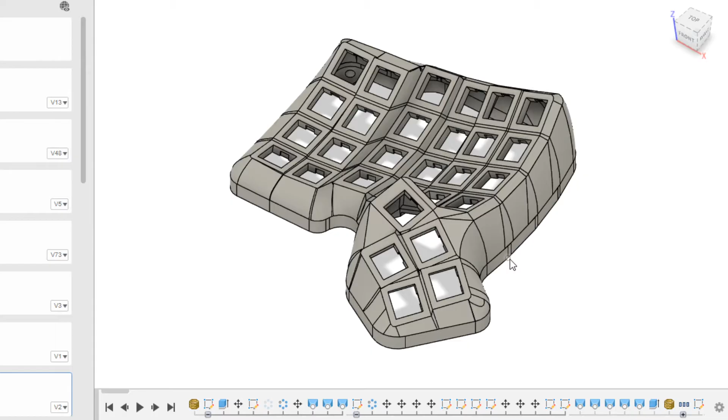Okay, I got the bastard keyboard here. Also tweaked the settings so the video should be a bit better. I just wanted to show you, here the thumb cluster is a mess. Connecting it is always awkward and you have to play around a bit and basically try 1,000 different solutions until you find what works, and that's a lot of effort.

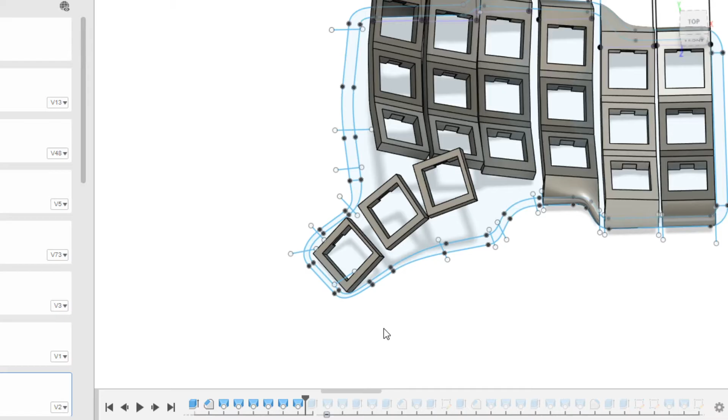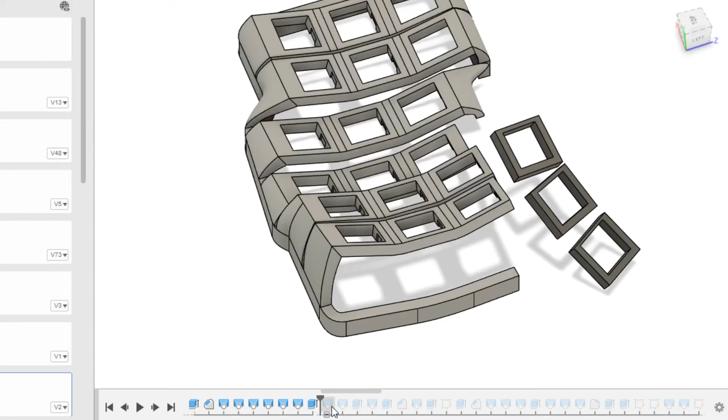So yeah, now I just work with the skeleton system here. Let's go forward in the timeline here. So what I did here is I extruded the plate, part of the plate, still not touching the thumb cluster area because when I was designing this I knew it was going to be a difficult part, so I didn't want to touch it yet. Then I connect the thumb cluster and see those holes in between the columns.

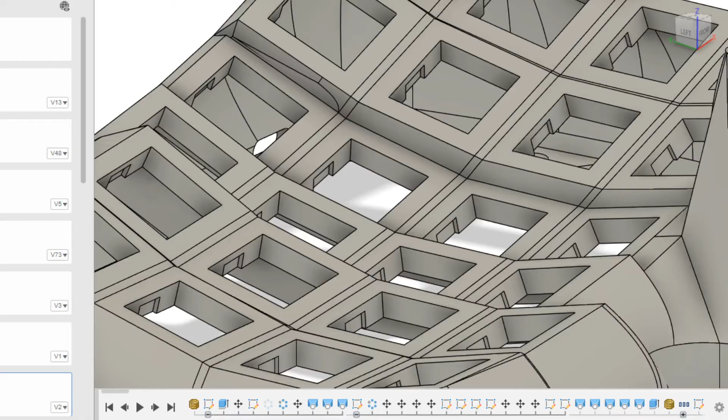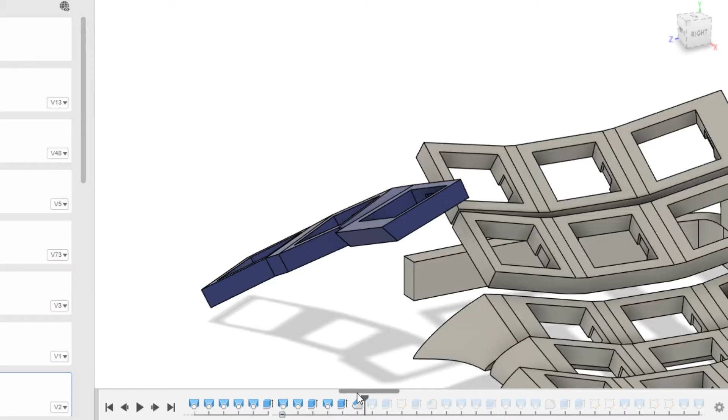Typically at this point you would want to start either lofting, which is here. You can see all the columns are lofted together, or, if you're working on something like me, yeah, just don't touch it. Let's see what I do next. Start working on the thumb cluster area. Here on the thumb cluster I do the same trick with the chamfer, and I start connecting it to the plate.

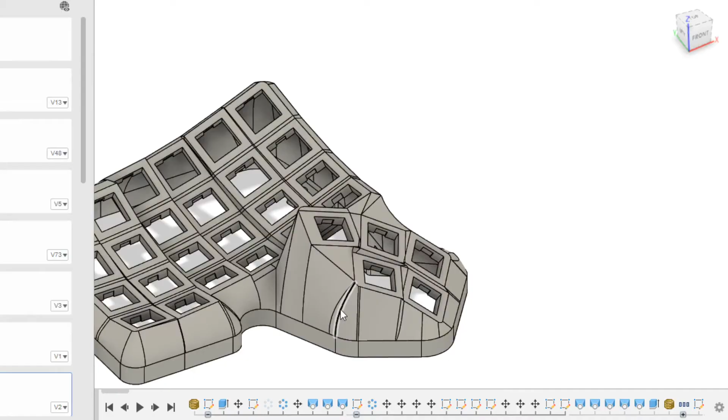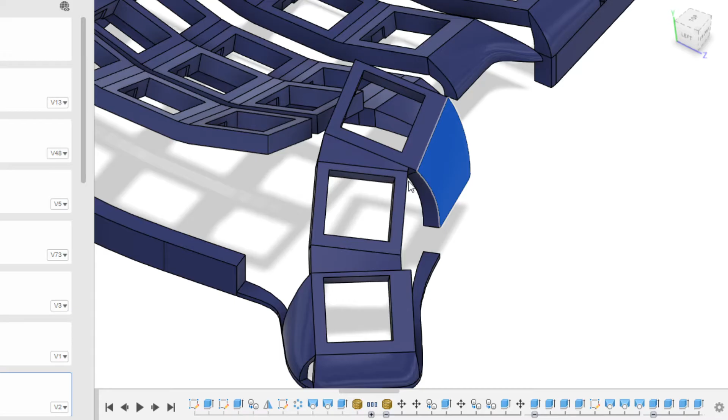Yeah, same thing, connect it to the plate, and on my bastard keyboard, the whole same thing. The whole thumb cluster is all connected everywhere, and for the mini and the skeleton, I played a bit around with printing different versions, and I found out that what worked best, like it was okay to have this whole switch at the top hanging on to this, but you want to check maybe by printing only the thumb cluster if it's solid enough and if it will move, because typically this is 3.5 millimeters,

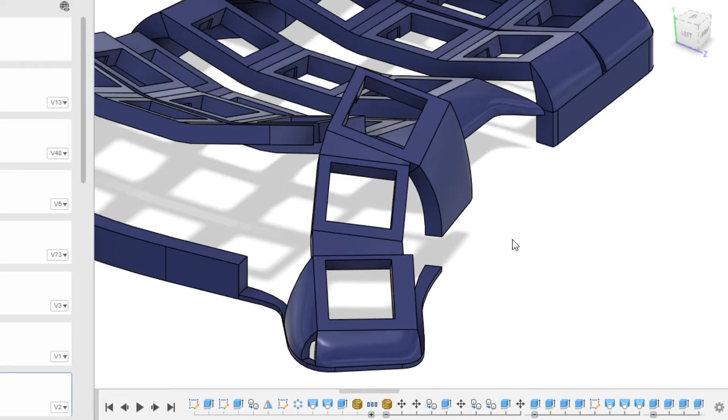and on my Skeletyl version 1 this was almost 6 millimeters I think, but this will not move at all. Meanwhile this will move a little bit with 3.5 millimeters. This will move a little bit when you're inserting the switch, which is no problem because it's PLA, it's pretty solid. It's not ABS, but during normal operation, just pressing on all the thumb cluster switches, it doesn't move at all.

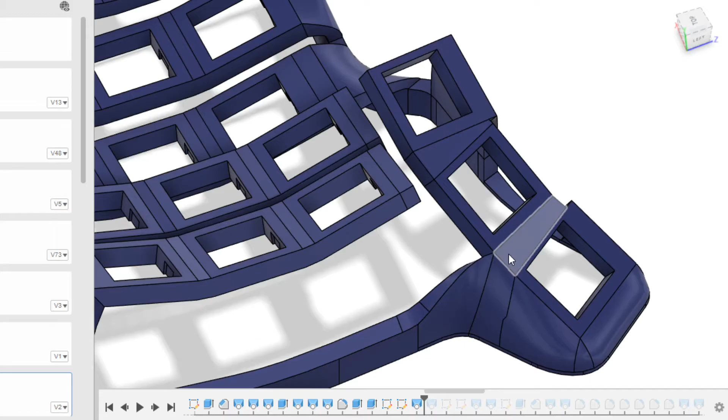Then I continue connecting everything. Here I did the loft. Then at this point I spent quite a bit of time trying to connect those two columns to the thumb cluster, and that proved to be a mistake because it took super long to do all the tests, and I didn't find any solution where I was happy with the looks of it. So in the end I just decided to go against it and have the columns just float in the air.

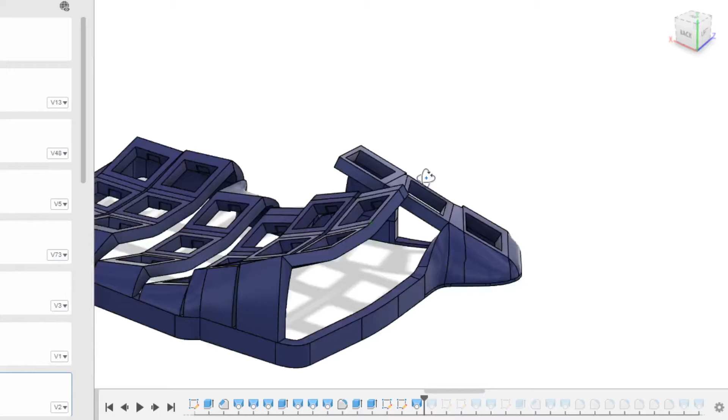But the problem is then that you have those two columns and the bottom is kind of just floating. And let's look at it from the bottom here. Those two are just attached from the top, so they will move quite a bit at the bottom here, and you don't want that. Here that's not a problem because everything is connected.

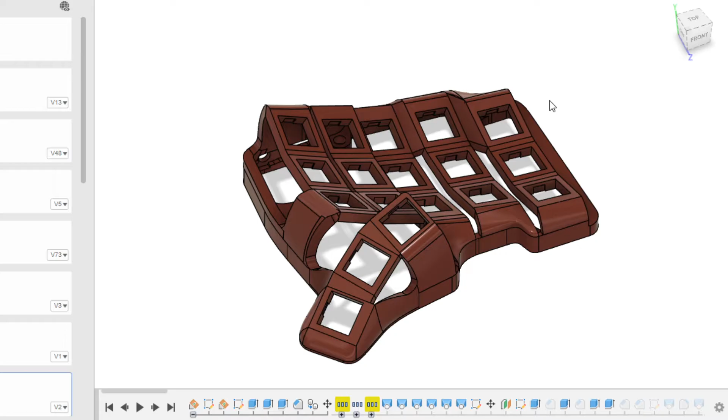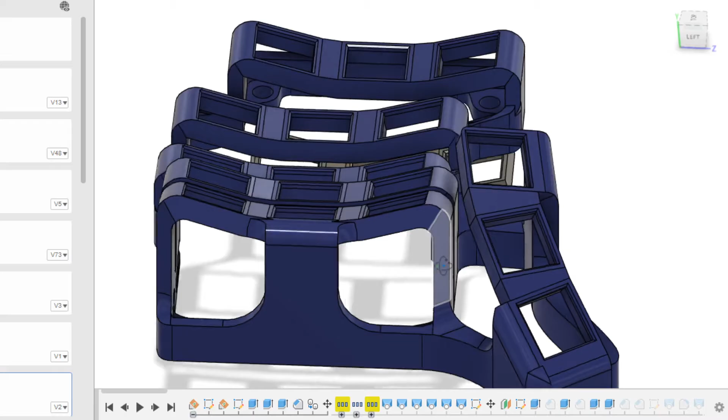But what I did on my first Skeletyl is I said, okay, I'm not gonna think about it too much, and I'm just gonna do it like the other columns, which is have walls that go all the way to the plate, and that's nice. But on my new design, the columns go quite a bit further because of the PCBs, and also yeah, this is not very nice. I have ribbon cables that need to go through here, potentially RGB cables. It's not really easy at all to route.

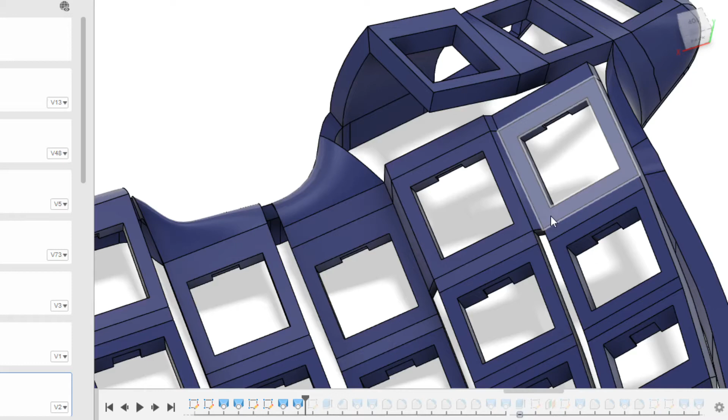So what I decided to go with instead is to connect the bottom of those two columns together and then to the third column. So this loft here and this loft here. This already gives quite a bit of strength, but it's still floating here, so... Is it here? Yeah. Extrude, chamfer like usual, and then loft.

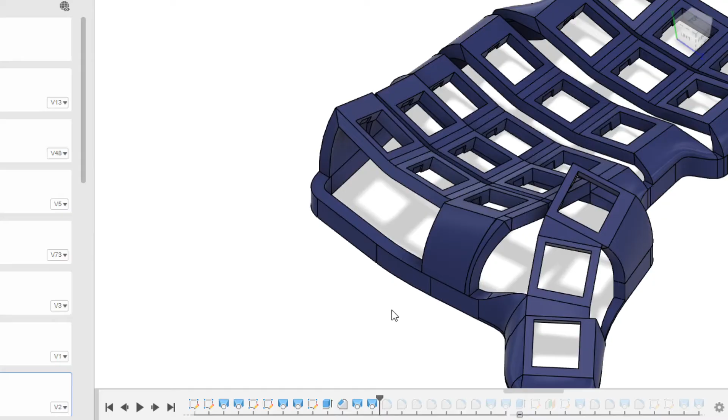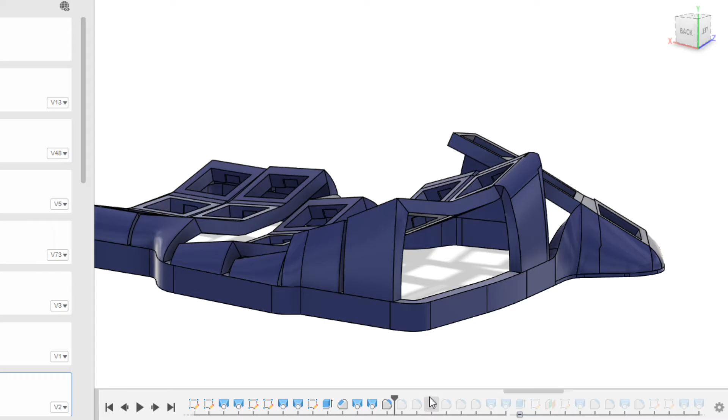See, voila. It's not necessary because this angle will already look pretty good in a print, and it depends on what you're looking for. I created only rounded lofts and then I added fillet. But if you want something with a bit more angles, you can play with that and just have straight lofts with very sharp angles everywhere. So here, let me try and get you a vision of everything. I just added fillets to everything.

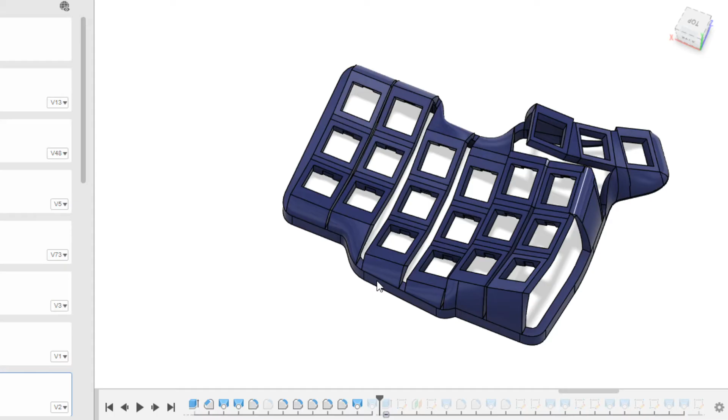Okay, Fusion is back. I even added a fillet to this top thumb cluster switch here because it looked nice.

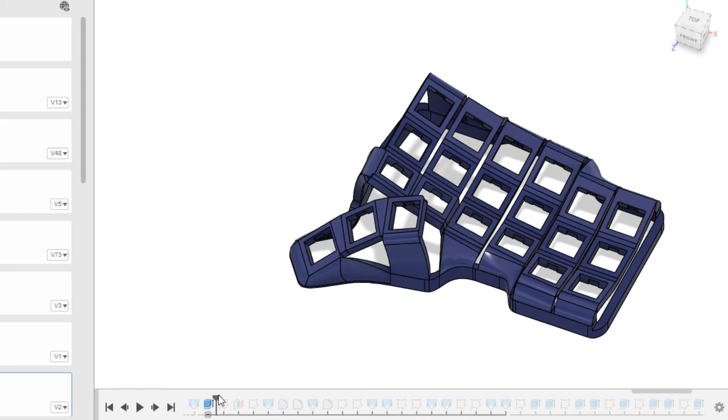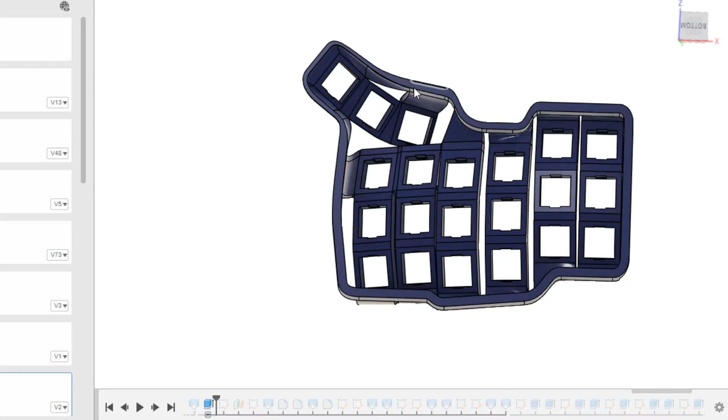Then, okay, at this point you're basically ready to print your first full test, and I would recommend to do that because the whole keyboard is already there, right? So what you want to work on next is adding fillets a little bit everywhere, if you like a bit more rounded look. You want to add the holes for the screw inserts. You want to add a hole for the USB and audio jack, or RJ, whatever you're using.

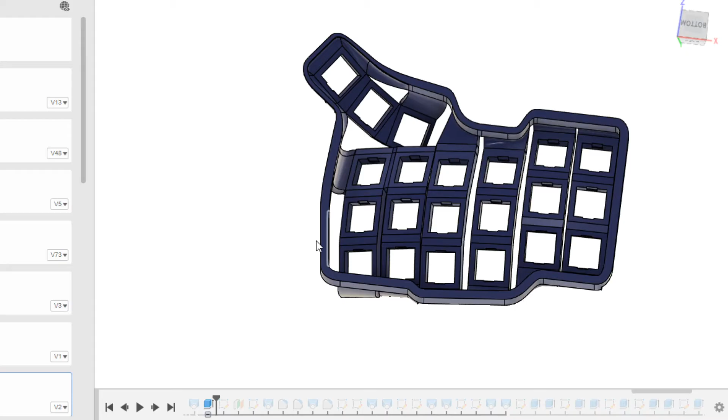That'll take a lot of steps, and you want to make sure that your keyboard is already looking kind of like what you want it to look, because if you have to go back and do modifications, Fusion is okay at it, but there's a good chance that by modifying something, the design of your screw holders and audio jack and everything will be messed up, and you will have to do it again. And that's double work you want to avoid.

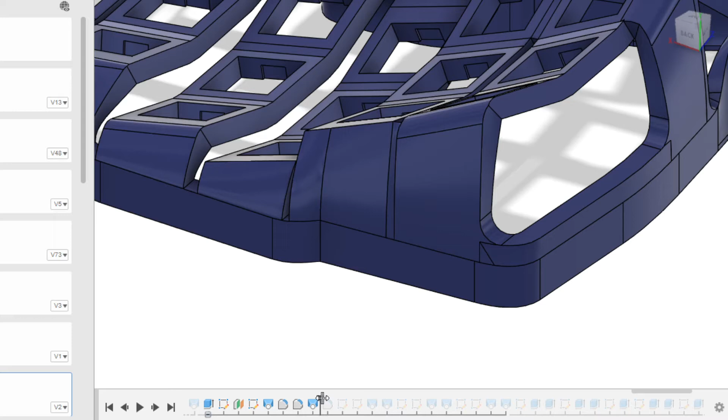In the back here, I extruded a bit higher because I knew I was going to have my audio jack hole somewhere here, and it's going to be pretty high, so this was a bit too low, just made it higher. Also connected those two columns here at the top.

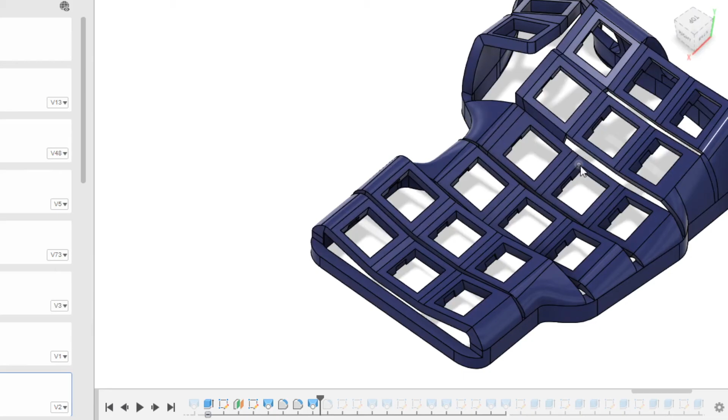And something that happened is I printed one of the first prototypes, which looked like this, right? Space everywhere, and I had problems around those two columns here at the bottom and top because the whole case would flex quite a lot. It's not a problem per se if you use it for personal use. You just have to be careful when inserting the switches, but I did want to work on the strength of it and make an overall very solid product.

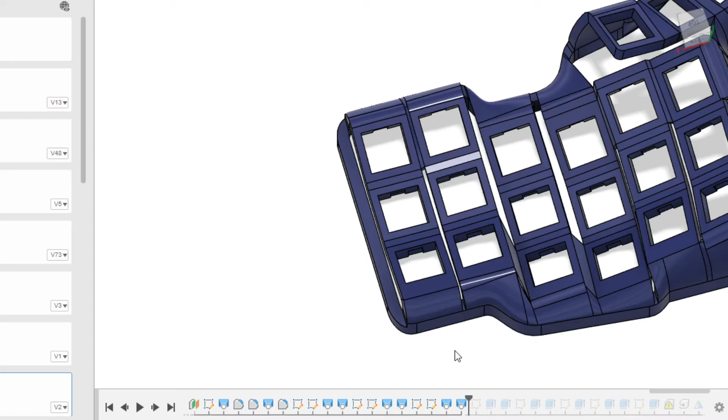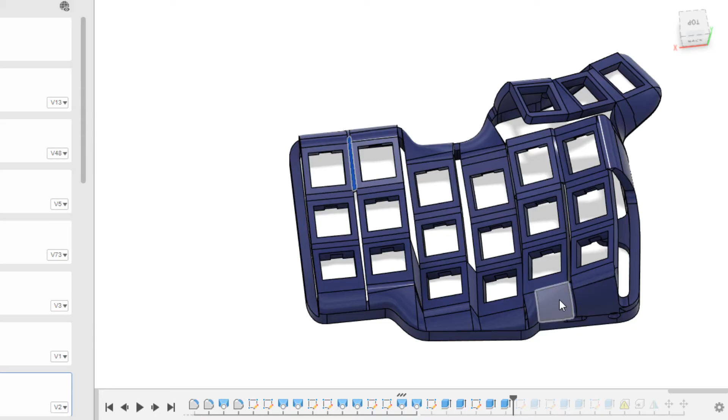So what I did at this point is I manually created sketches inside of the column. So I created a sketch here, for example, and another sketch here. Then I projected the switch holders onto the sketch and I connected them with the loft. And I did that a little bit everywhere, so between those two columns and then those two and those two and those two as well.

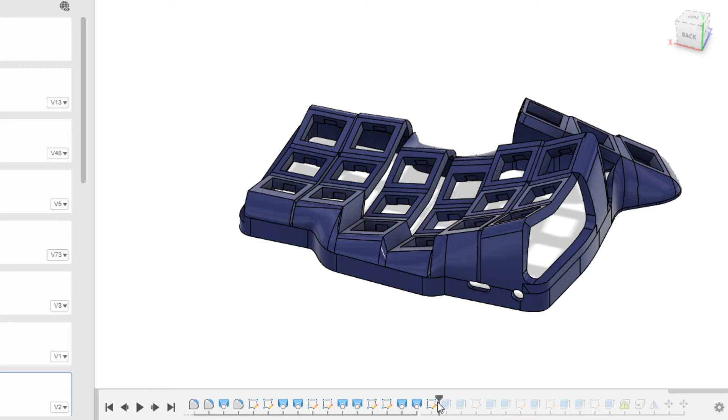But I did keep a lot of empty space in the keyboard because it helps with sound, it's easier to design, and I think it looks very nice. Let's also show you the audio jack. Okay, yeah, let's look at the audio jack and USB-C here.

So if you look inside, you'll see two things. First, they have a certain size. And again, depending on which audio jack you use, depending if you use USB-C or micro USB, and depending how you install things, this is made for a PCB which has both the Elite C and the audio jack on it.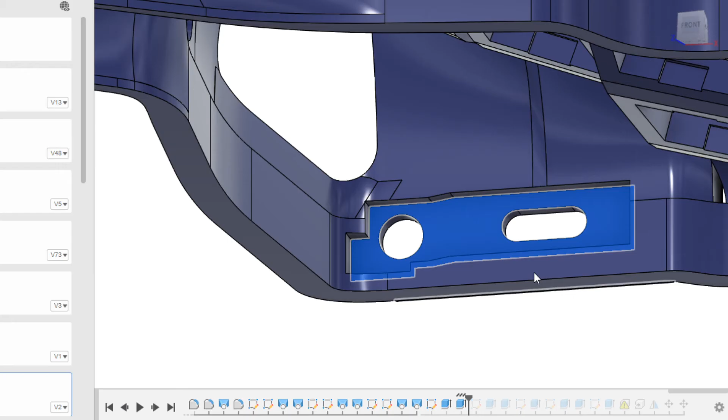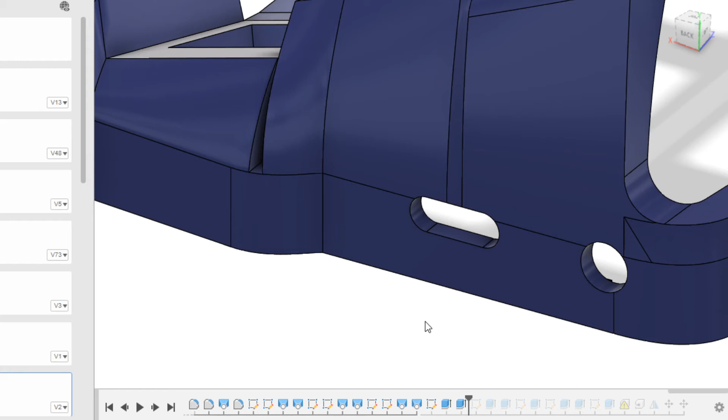Typically, if you're going to hot glue the audio jack, you want to leave a bit more space. This extrusion into the case is so that the whole wall is exactly 2 millimeters, because that's what I found works best. I just put the Elite C flush against the USB-C hole, and the USB-C will go inside the hole maybe half a millimeter or so.

Then once you insert the USB-C cable, it will insert perfectly and be almost flush against the case. That's something you want to test: just generate an STL, cut out this little part of the case, don't print everything, and print a few tests. It takes maybe 1 or 2 hours, and then you can do multiple revisions and check what works best.

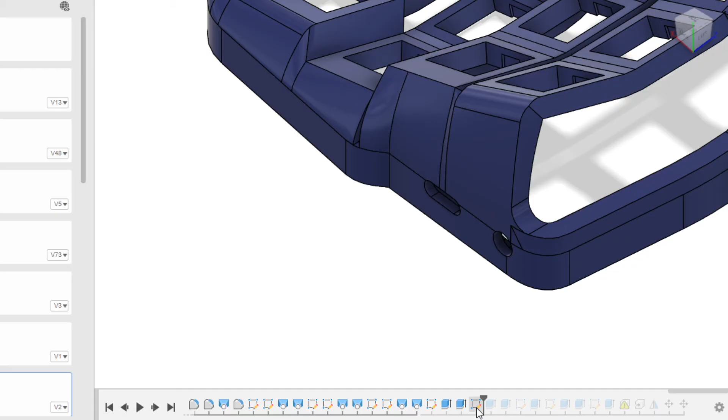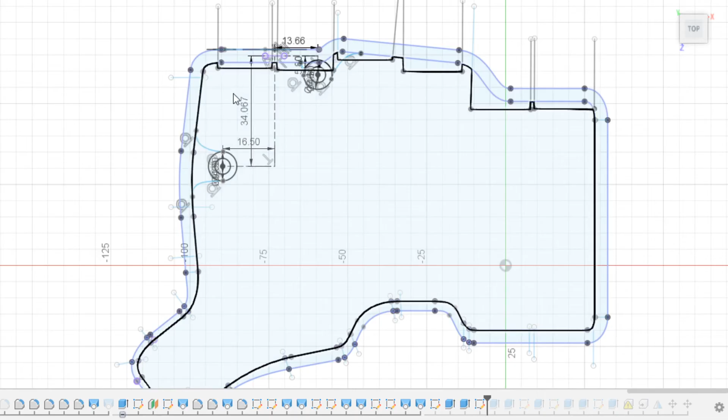Then the screw holders. So for the screw holders, this is the screw holders for my Elite C holder PCB. This is a PCB that I released a few days ago on GitHub. There's the KiCad files and the gerbers as well. It's basically a PCB that you solder the Elite C and the audio jack onto, and it also has a reset button, RGB pinouts, headers, and screw holes.

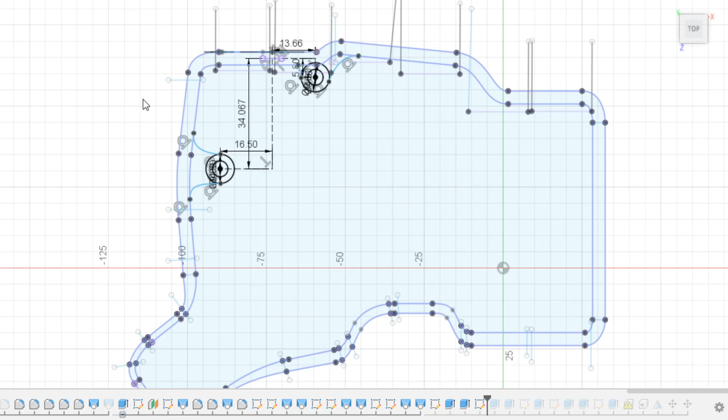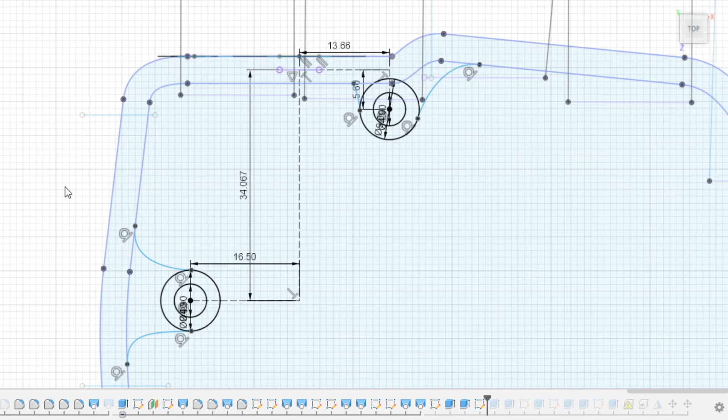And that's why I put my screw holes here. But if you're using something else, like some black pills which also have screw holes, that's something you want to change. Or if you're going to hot glue the Elite C or your Pro Micro in there, I've seen quite a bunch of different solutions floating around—the sandwich solution, I believe it's called. Or what I used to do is have a 3D printed holder in which I'd screw in the Elite C like a sandwich, and it would hold, and then I'd just screw the whole thing into the bottom plate and screw the bottom plate onto the case.

Let's open back up the bodies here. So those are my screw holders for the Elite C holder PCB, and I use 4mm screws, so the screw insert size is almost 5mm wide.

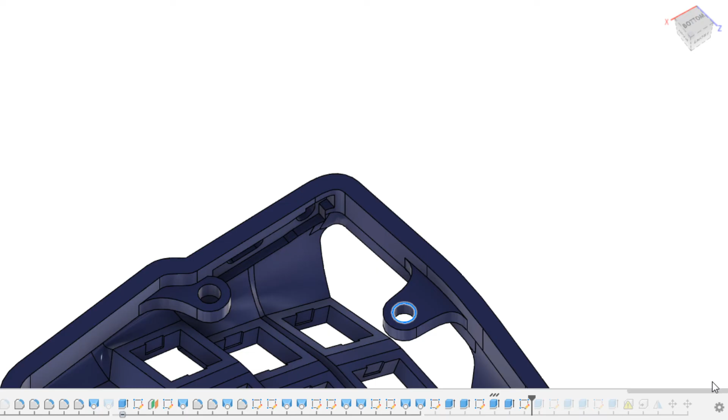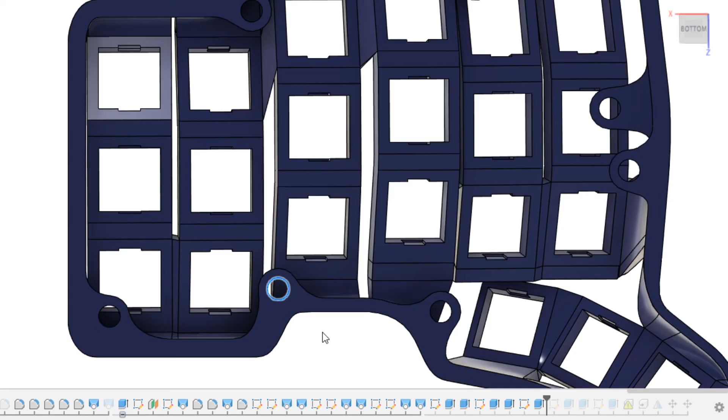Same thing, depending on the screw holder, just print some tests. Then I do basically all the other screw inserts, and what I like doing is placing the holes wherever there's no switch too close to. On the Mini that's a problem, because typically I'd like to add another screw holder on the top here, but I can't because it would make the switch difficult to install, so I put it here instead.

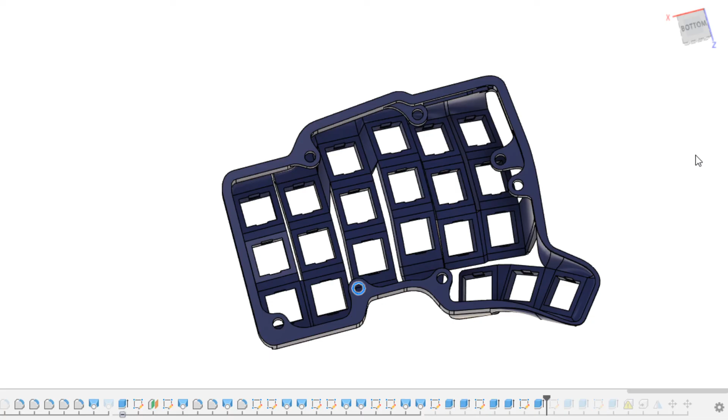That could be a problem if you typically have a lot of cables inside pushing against the plate, and then the plate won't be completely flush. But I just make sure when building those keyboards that everything stays inside the case and the plate doesn't move, even though it's not screwed in here.

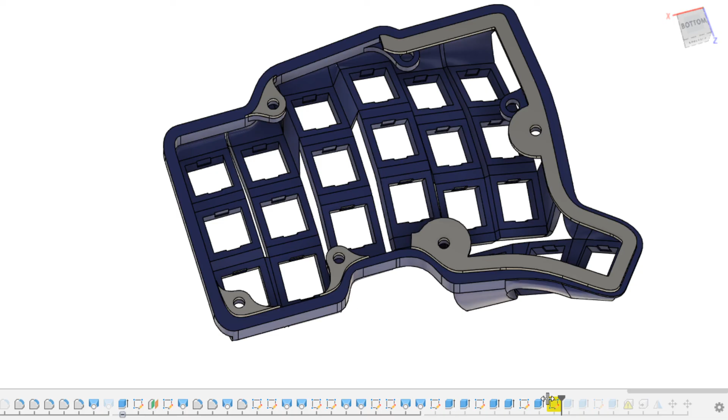Then—what do I do—okay, and this is for the tenting plate, and that's it. That's basically in 10 minutes how I create a keyboard in Fusion 360. And I did give some pointers, like use chamfers, use lofts, but that's just how I did the Mini.

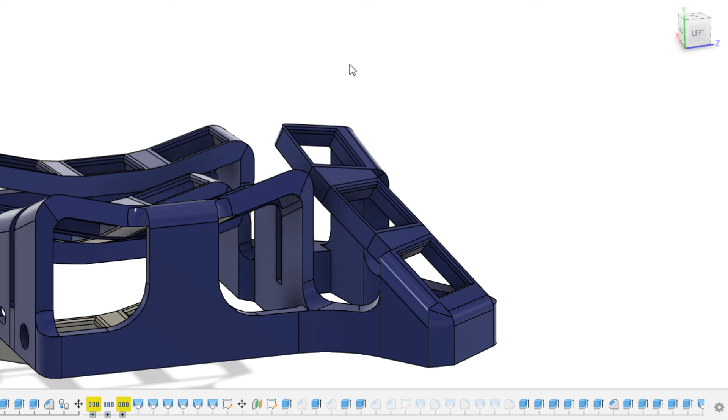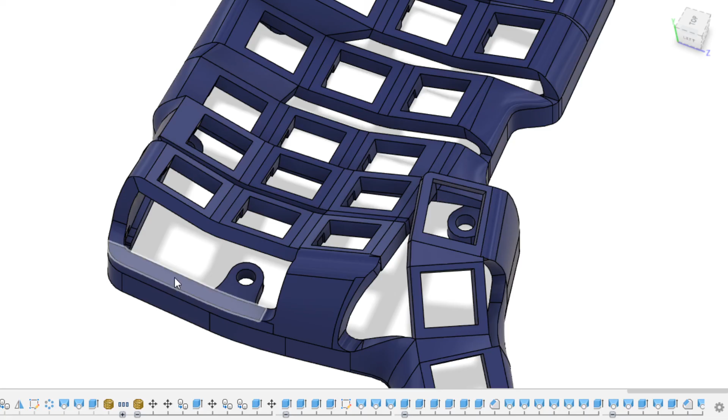And the original bastard keyboard, which is here, I did very differently. You can even see here, this is flush to the switch holder, while this is not. I would recommend not doing that. I would recommend using the same technique everywhere, because if you later want to remove the holes and connect all the switches together, it becomes way easier.

Because typically, for example, here you'll have something like a triangle to connect, and here's a square—you get all kinds of different shapes because of the way you did it. And Fusion lofting does not like that at all. So that's it, I hope it helps a bit.